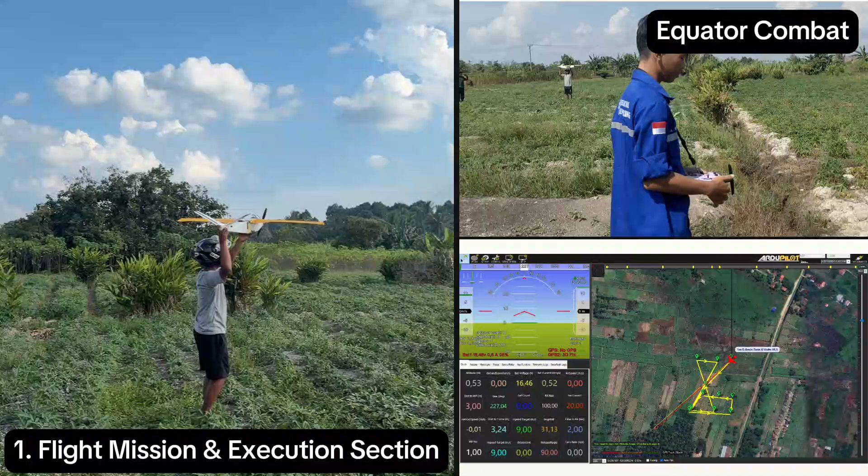Manual. Stabilize. Auto.

Poin berapa? 37. 38. 38. 40. 40. 39.

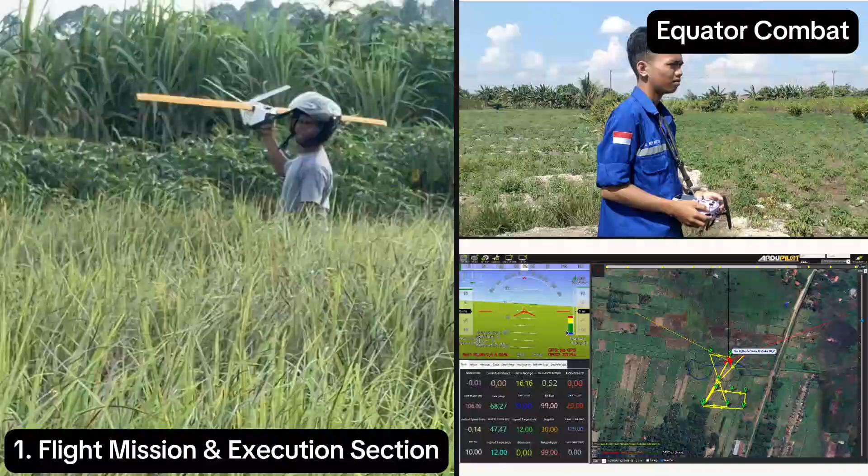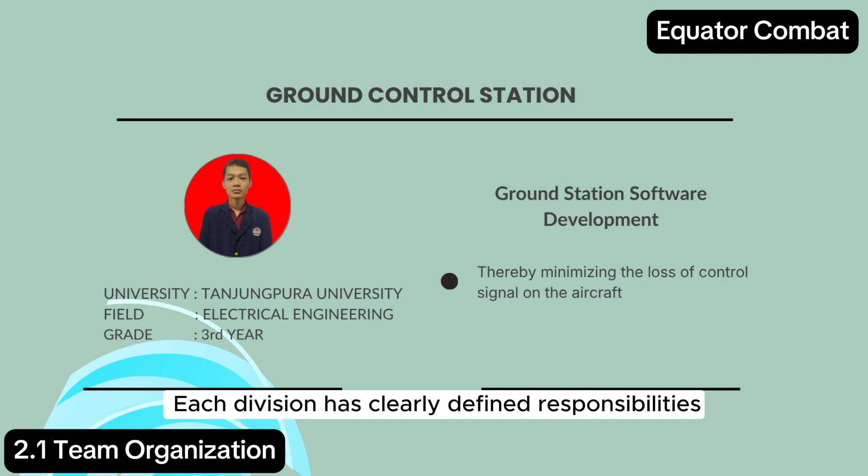This structure allows every member to focus on their area of expertise, improve coordination, and reduce development time. Each division has clearly defined responsibilities and follows its own work schedule while maintaining close communication with the other divisions.

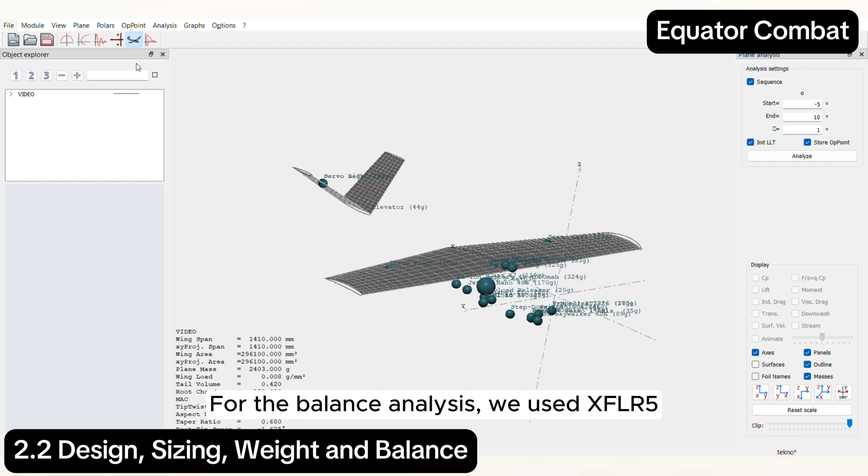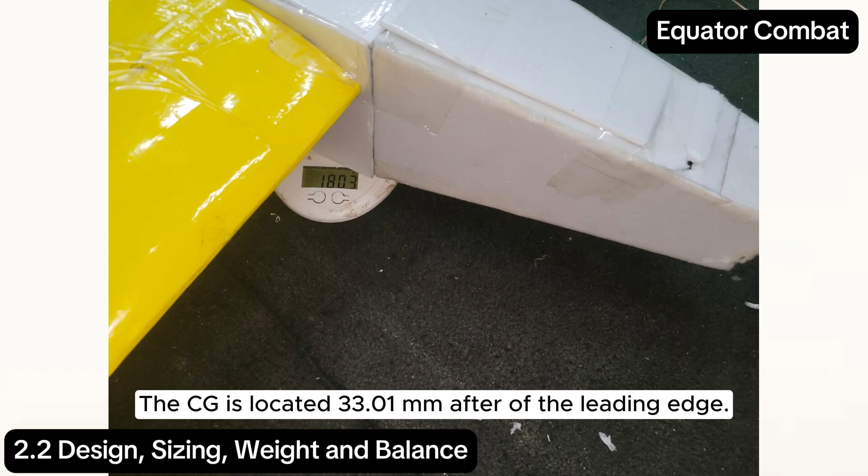For the balance analysis, we use XFLR5. This analysis ensures proper weight distribution, aircraft stability, and controllability during flight. Total aircraft weight is 2,403 grams. The center of gravity is located 33.01 mm aft of the leading edge.

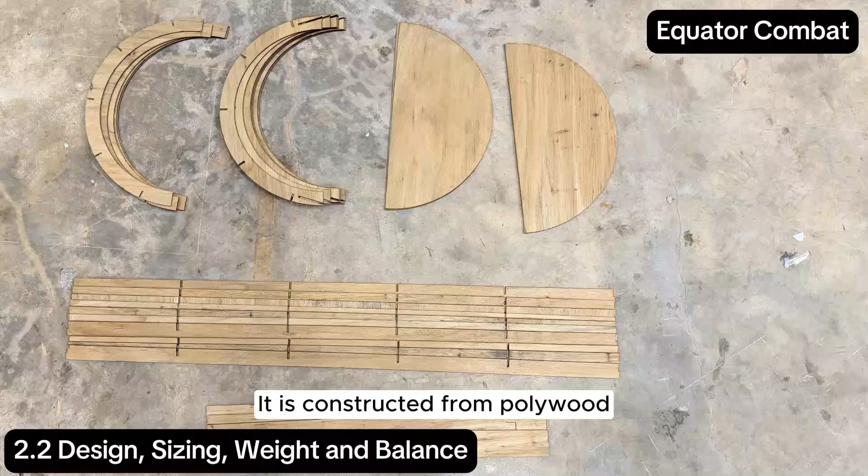The storage box has a diameter of 37 cm and a length of 105 cm. It is constructed from plywood, providing a lightweight yet durable structure that protects the aircraft during transportation.

The storage box is also designed to be light enough to be carried comfortably by a single person, while ensuring adequate protection against handling and travel impact.

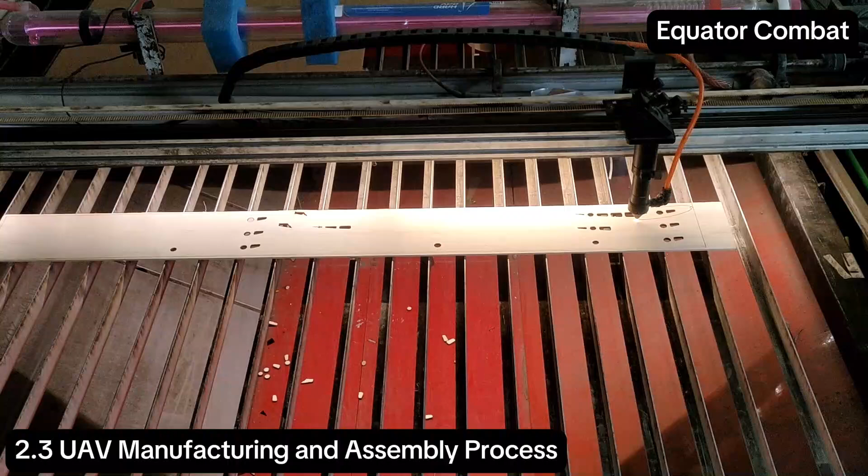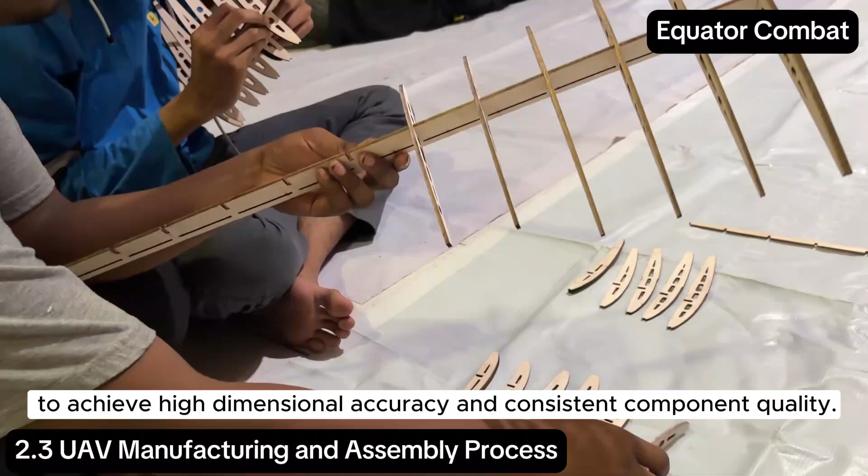The wing and fuselage structure were fabricated from balsa wood using a CNC cutting machine to achieve high dimensional accuracy and consistent component quality.

After fabrication, the structural frames of the wing and fuselage were assembled and bound using adhesive.

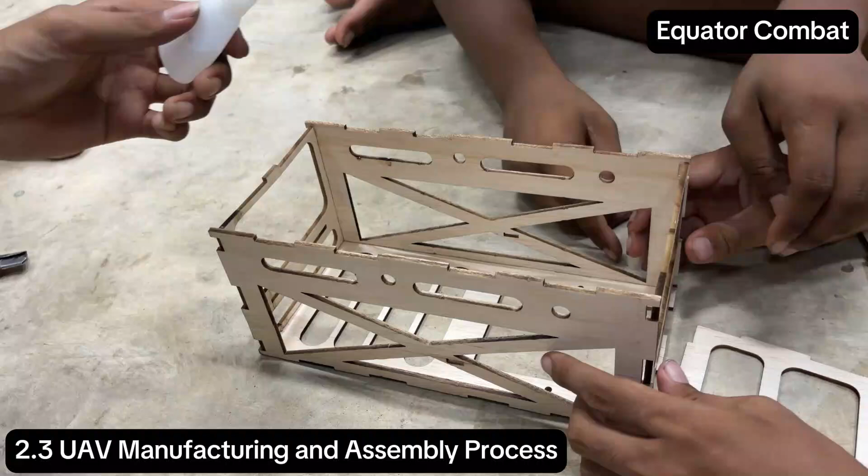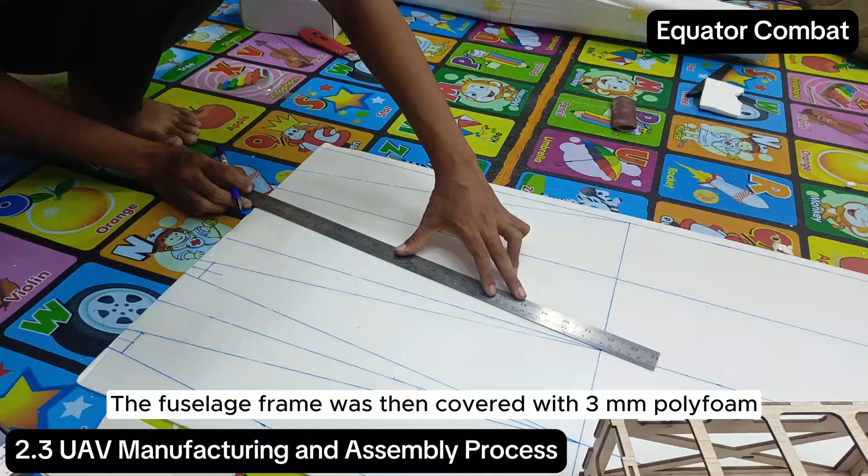Meanwhile, the wing structure was covered with MonoKote heat-shrink film. The fuselage frame was then covered with 3 mm polyfoam, providing a smooth aerodynamic surface while maintaining low weight.

The V-tail is reinforced with a 2 mm carbon fiber spar, increasing its structural stiffness and strength.

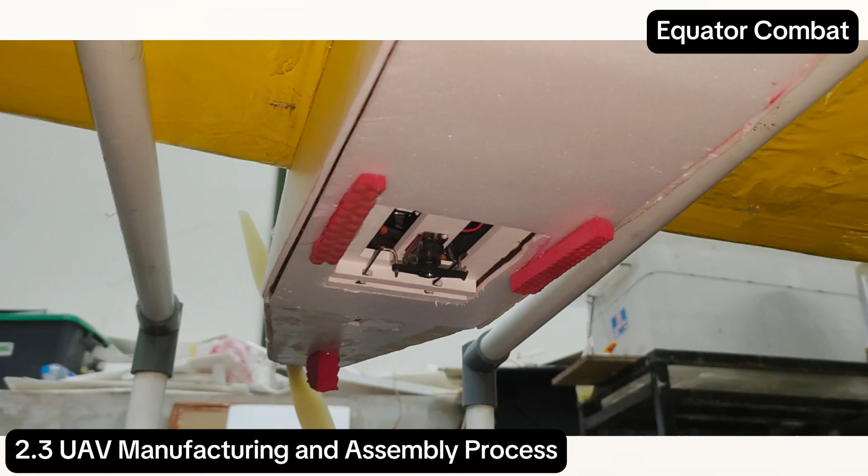The landing skid was fabricated from recycled rubber, which provides effective impact absorption during landing, while remaining lightweight and cost-efficient.

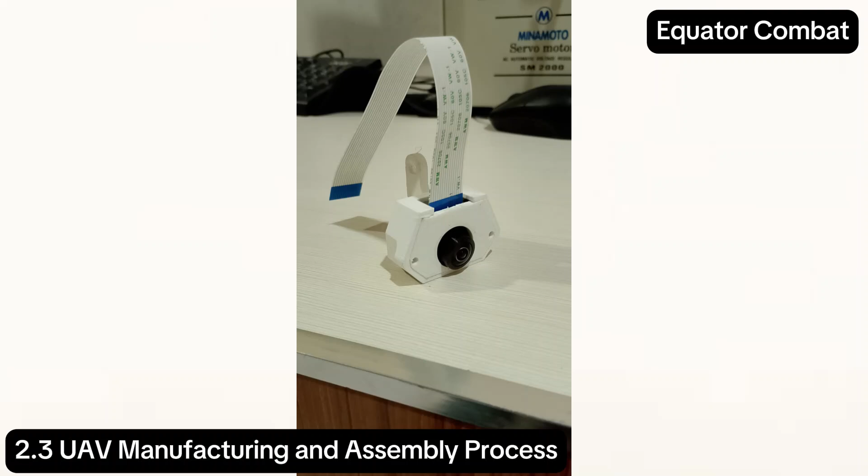The V-tail bracket, servo bracket, and camera bracket were manufactured using 3D printing with polylactic acid materials, enabling precise fabrication and easy replacement when necessary.

The payload is made of lead and has a length of 4 cm and a diameter of 2.2 cm.

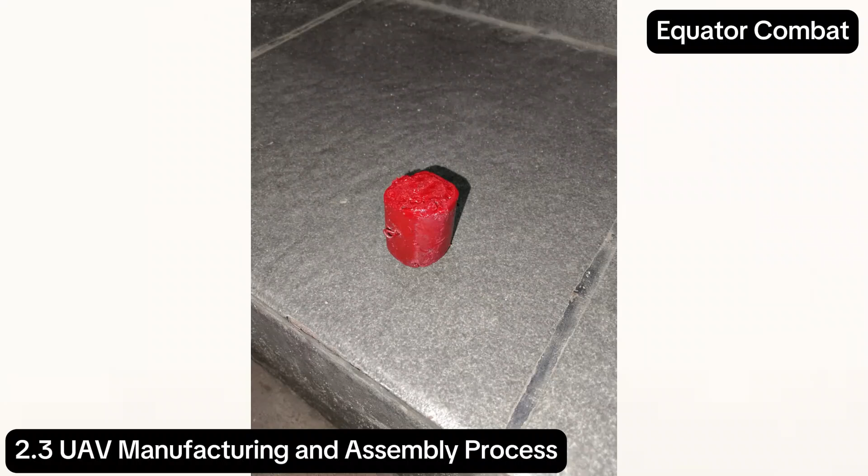The aircraft is equipped with two aluminum spar joiners with diameters of 9 mm and 8 mm to enhance the structural strength of the airframe.

In addition, the spar joiners provide a modular assembly system, allowing the wings to be easily detached and reassembled for transportation.

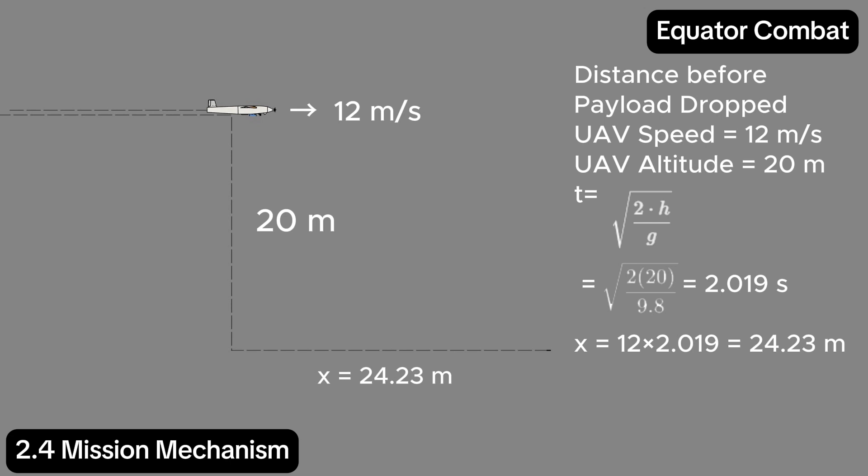During flight, the NVIDIA Jetson Nano continuously receives the aircraft altitude and airspeed data from the flight controller. These flight parameters are used to calculate the optimal release distance before payload deployment.

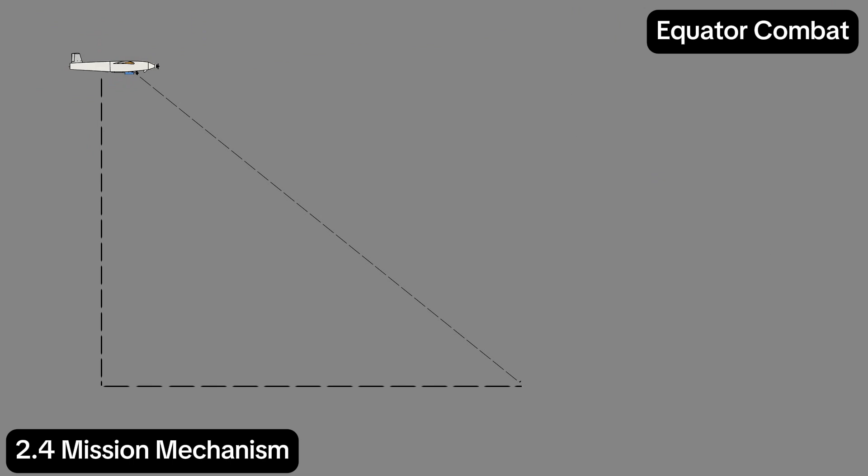The camera angle is updated continuously in real time according to the aircraft's current altitude and airspeed. When the calculated camera angle is achieved and the detected target is in line with the center of the camera image, the system automatically releases the payload.

The payload release mechanism consists of one servo motor and two release wires. Each payload is attached to a dedicated wire connected to the servo arm.

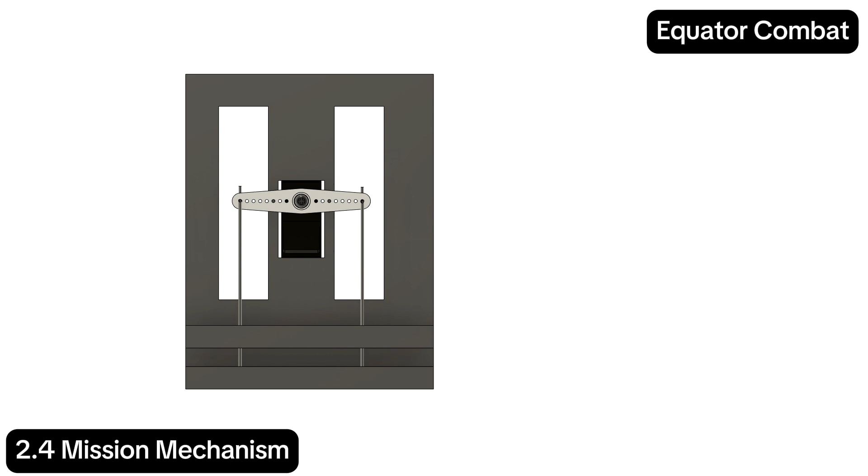In its default position, the servo is set to 90 degrees, securely holding both payloads. When the onboard vision system detects a blue square target, the servo rotates to 0 degrees, releasing the red payload onto the target area. After the payload is released, the servo automatically returns to its neutral position at 90 degrees.

The UAV is equipped with a CUAV X7 Plus flight controller, which provides reliable flight control, sensor integration, and autonomous mission execution. Ground control and mission planning are performed using Mission Planner, enabling flight configuration, waypoint management, telemetry monitoring, and mission execution.

The propulsion system consists of an AT2826 motor controlled by a Skywalker 60 ampere ESC, powered by a 4S 4000 mAh Li-ion battery. Flight control surfaces and the payload release mechanism are actuated using EMAX ES3352 servos.

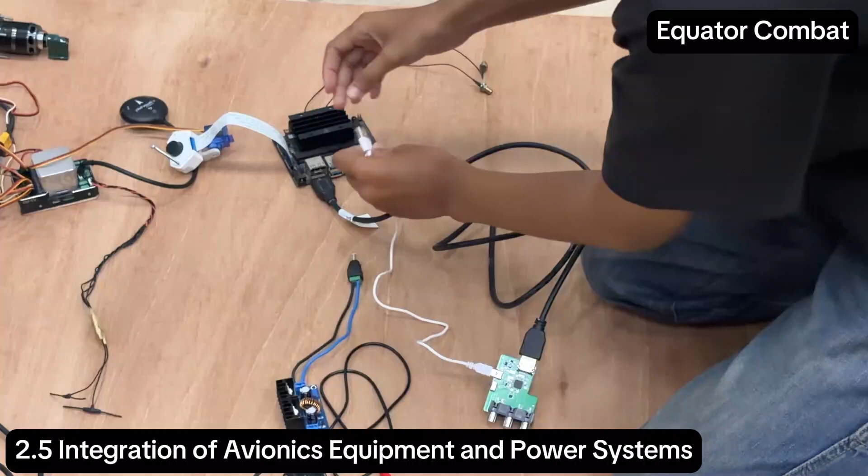The onboard vision and target detection system is implemented on an NVIDIA Jetson Nano, which processes images captured by a Sony IMX219 camera. The Jetson Nano performs real-time target detection, target location, and payload release calculation during flight.

For manual flight control, the UAV used a Jumper T-15 radio transmitter with an ELRS communication link, providing a long range, low latency, and reliable connection between the transmitter and the aircraft.

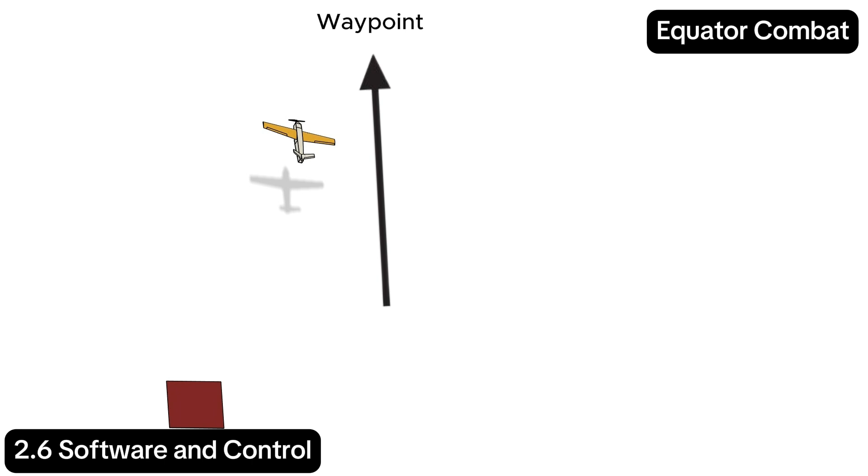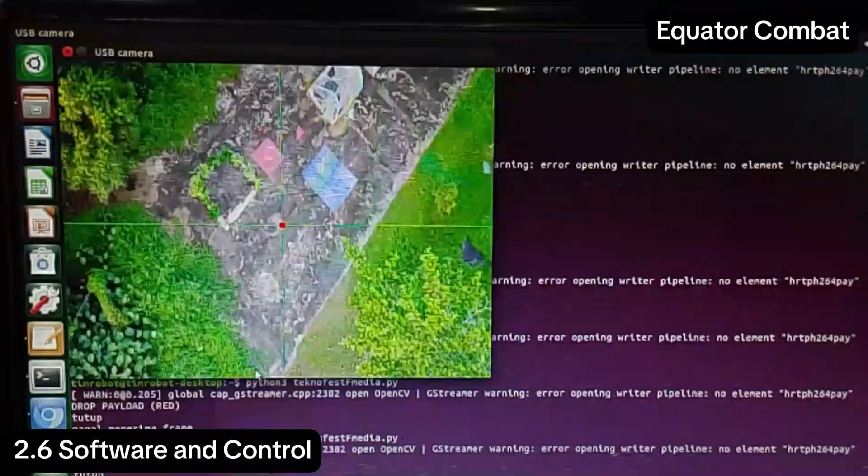The target detection algorithm identifies objects based on two criteria: color and geometric shape. First, the captured image is converted to grayscale to simplify image processing and enable contour extraction. The detected contours are then analyzed to determine the number of vertices, allowing the system to recognize the object.

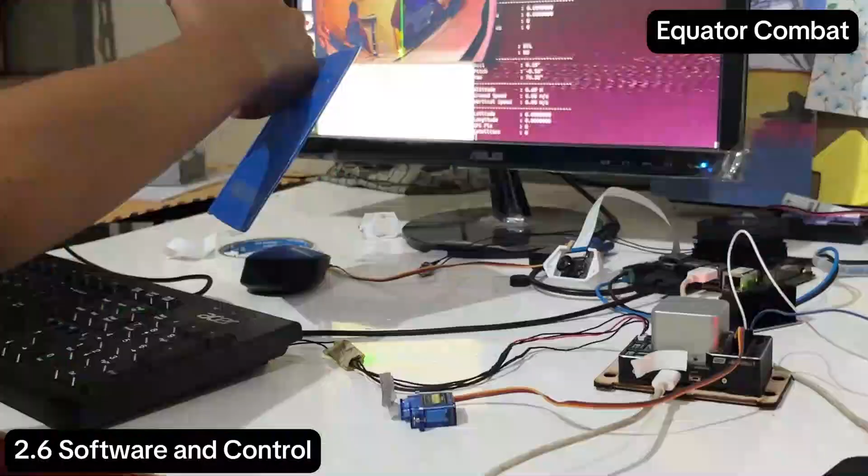The object has four corners. The integration works as follows: the camera records video, then the NVIDIA Jetson Nano processes the image, and then the Jetson gives a command to the flight control to move the servo when the target is at the center point of the camera. Code is used to read angles and read colors, calculate the target position relative to the camera center, and execute drop logic.

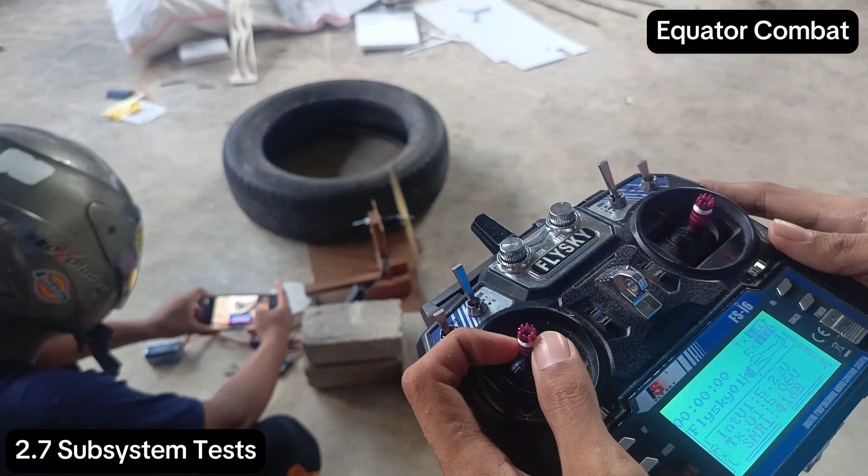A static thrust test was conducted using a digital scale to evaluate the propulsion system performance. During the test, the motor was operated at 100% throttle, and the maximum current drawn was measured at 48 amperes.

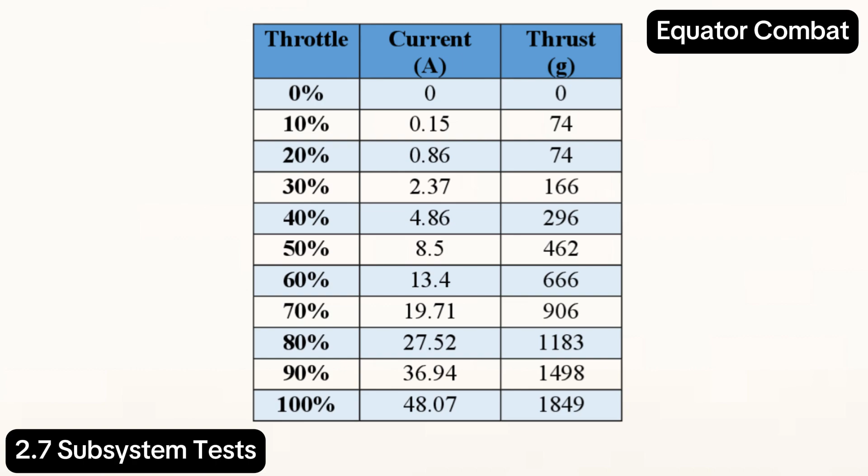A comprehensive manual control system test was also performed to verify the correct operation of the flight control surfaces. The aircraft was manually commanded to roll right, roll left, pitch up, pitch down, yaw right, and yaw left to confirm that the ailerons, elevator, and rudder respond correctly to pilot input.

Stabilize mode was tested by manually disturbing the aircraft in the roll and pitch axes. The corresponding control surfaces were observed to ensure they generate corrective deflection opposite to the applied disturbance.

The structural integrity of the airframe was evaluated through drop tests conducted from heights of 2 meters and 6 meters. After each test, the aircraft was inspected for structural damage. No cracks or permanent deformation were observed, demonstrating that the airframe possesses sufficient impact resistance to withstand accidental landing impacts and handling loads.

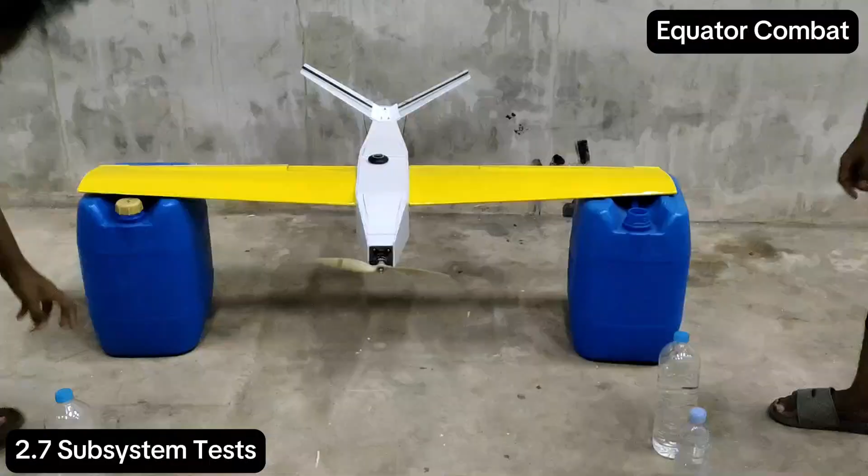The wing structural strength was evaluated through a static load test by applying a 3 kg load to the wing. The test was conducted to verify that the wing structure and spar system were capable of withstanding the expected aerodynamic loads during flight.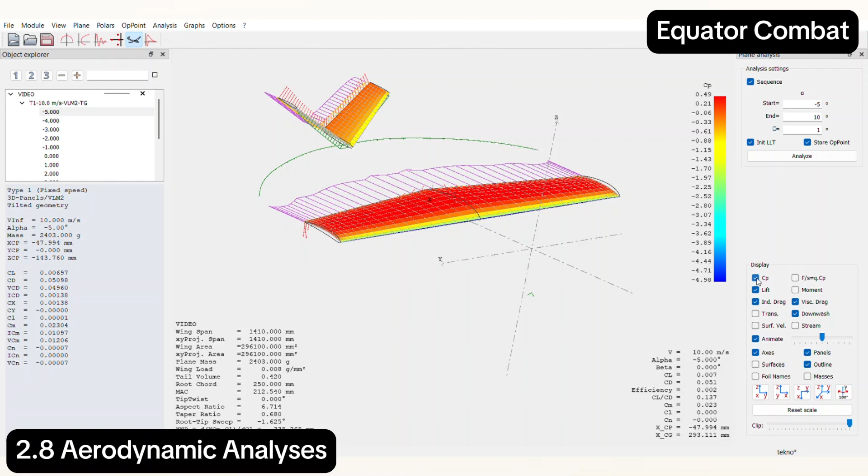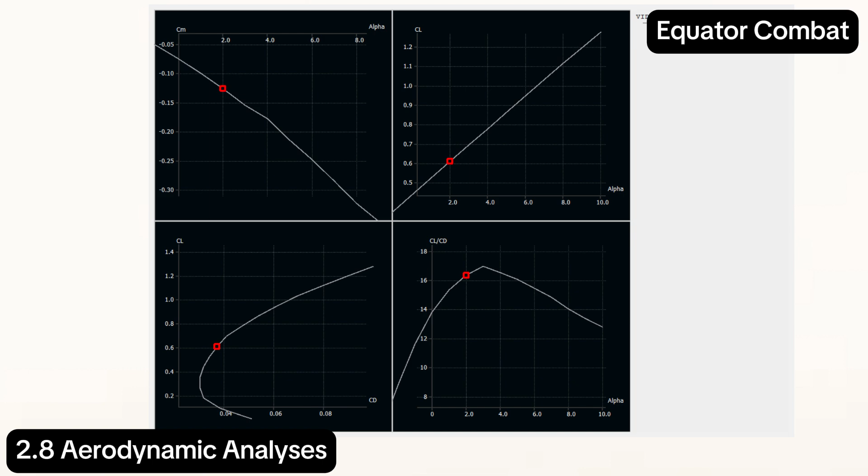The XFLR5 simulation results show good aerodynamic characteristics. Lift increased as the angle of attack increased. The pitching moment shows longitudinal stability, and the maximum CL/CD value of around 16 to 17 indicates the most efficient flying condition. The total weight with payload is 2,403 grams.

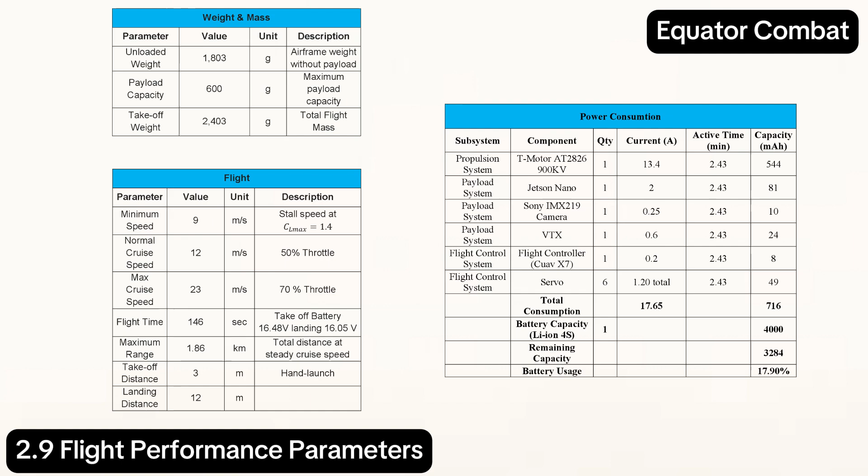We also obtained a normal cruise speed of 12 meters per second. From the flight test, the average flight time was 2.43 minutes, with a total power consumption of 17.90%. For flight safety, the UAV was configured with a Return to Launch, or RTL, failsafe.

In the event of a loss of radio communication or another failsafe condition, the flight controller automatically switches to RTL mode.

The V-tail and fuselage are secured using removable bolts.

An emergency switch is installed to immediately disconnect the electrical power supply to all onboard components. These features provide a quick and reliable method of shutting down the aircraft in less than 2 seconds. A motor lock function is implemented to prevent the propulsion system from starting unintentionally.

There are some changes. For the flight controller, we use the CUAV X7 because it has physical durability and sensor quality, processing capabilities, faster signals, and more adequate input-output for additional payload needs.

And then for the camera, we switched to the Sony IMX219 because it supports interchangeable lenses for aerial photography and is more compatible with the Jetson Nano interface.